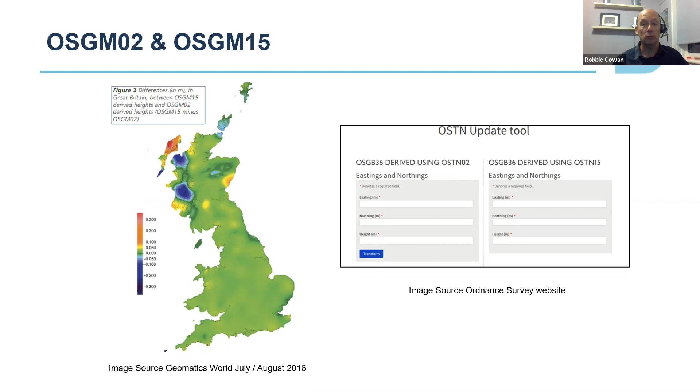On the right hand side is the OSTN update tool. You don't have to do any survey with this actually out in the field. You can simply put in the coordinates of your site, arbitrary coordinates within your site, and then a height. You could put 10 meters, for instance, and then you could do a check to the 15 and see what the height changes to, and that gives you the separation of the difference between the two geoid models. Very helpful to have.

Carrying on with the survey brief, terms and conditions. Obviously that's important to have within the document. You're specifying whether you're using your own terms and conditions or whether you're using client ones, but it's important to include those. An introduction and a background to the project as well, and the aims and objectives of the survey data.

The more you can tell or let the surveyor know about what the data is going to be used for, the more that, in a sense, they can help you. They're going to be your eyes when they're actually carrying out the survey. And so therefore, if they understand what your aims and objectives are, then they're more likely to be able to feed back to you anything they see that can maybe influence this actually in the field.

The survey scope itself needs to be clearly written and summarise the services that you require. So here's an example, it's the same document I've taken it from. You can see here 2 different water courses. The modeller has clearly specified how many sections they want. Eshton Beck, a total of 33 sections. On the Morton Beck, a total of 58 sections. And so therefore the surveyor knows at tender stage exactly how many sections are needed as part of this commission.

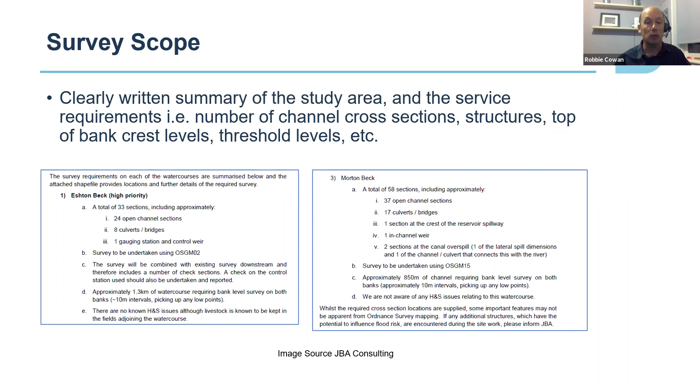There's a length of watercourse in each of them, top of bank in each of them as well. And again, the modeller has specified very clearly actually what's required: approximately 1.3 kilometres of watercourse required on both banks, again specifying on both banks so that it's very clear actually what's required. And then they include some health and safety as well, of known issues that they have.

The technical requirement of the survey scope: survey control. Well, you might already have survey control in your area, and so therefore you might just want to check it. Or there might not be any survey control, and so therefore you want the surveyor to establish new control. Or for larger projects, it could be both. It could be a case of establishing new control, but also checking onto some existing ones. Your reference system: Ordnance Survey National Grid, and probably nowadays OSTN15 and OSGM15.

The cross-section naming is quite important, specifying where you want the zero chainage to start. Is it a confluence? Is it part of existing survey data? So therefore you might want it to be tied into that existing survey data. And the format as well. Is there a specific naming format that you want it to follow? This is quite important because it's very difficult for the surveyor to change all this at the end, so they could deliver you all these sets of lovely deliverables, and then all of a sudden if you said, oh, I wanted the zero chainage to start at such and such a point, it would basically mean that they would have to reprocess everything. It would be very time consuming.

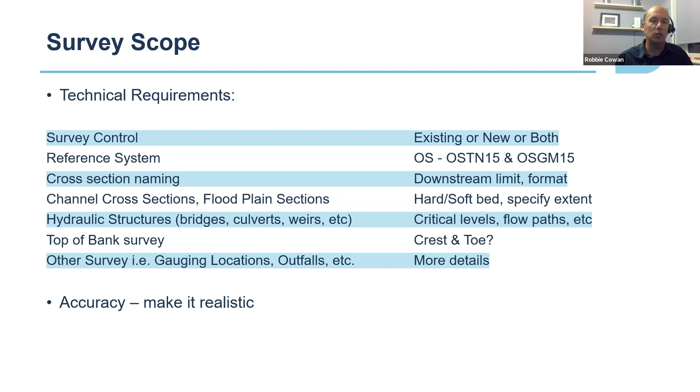But if you just said straight away, well, you want all your survey data to plus or minus 5 millimetres, for instance, that would add tremendous cost onto your project when it's not needed. And the problem you'd end up getting is that, if you went to 2 or 3 survey companies, some of them might just dismiss that accuracy and say, well, for a grass bank, top of embankment, you don't want 5 millimetres. You can't use that accuracy. So I'll just discard it and I'll do what I think's right. So as I say, it's important that you make the accuracy realistic.

The kind of last thing in the survey scope is the deliverables. You need to state clearly what deliverable formats you want. The survey report should be comprehensive for a national data set. It needs to go with the data, and it needs to explain the survey, how it's been done, how things have tied together, how you've incorporated cross-checking and made the results robust.

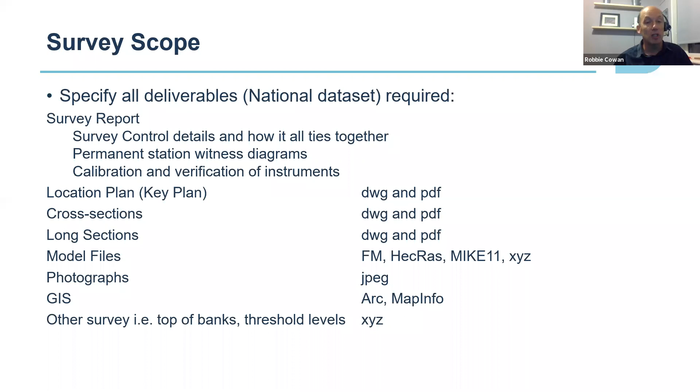You need to include your permanent stations as well and your calibration certificates. And then there's a number of standard deliverables that are contained within the Environment Agency survey specification. Location plan, cross sections, long sections, model files, probably in all those formats, so they have the flexibility of multiple users or in the future. Photographs, GIS, and other survey like tops of banks.

The big difference with a site-specific requirement is that it's only you, the modeler, that's going to be using that data. It's not going to go into some data archive. So therefore, you potentially would cut right down the deliverables that you're requiring. I would still ask for a basic survey report because that again tells you the user how things are tied together. If there's an existing topographical survey, you want confirmation that it's been tied into that.

Location plan, so you can see where the sections have been taken, cross sections, model files, just a single format, whatever model software you're going to be using, and obviously the photographs. So it's cut down quite dramatically.

The mapping is very important, as well as having it written down, what's actually required. The surveyor needs to see a graphical representation of it. And it needs to be as clear as possible and as precise as possible. So within your GIS table, instead of just having cross-section, if you had upstream face of road bridge, downstream face of road bridge, then this gives much more information to actually understand what you're wanting surveyed. It's good to include these tables in Excel format and PDF format because they're basically quite uniform to actually use.

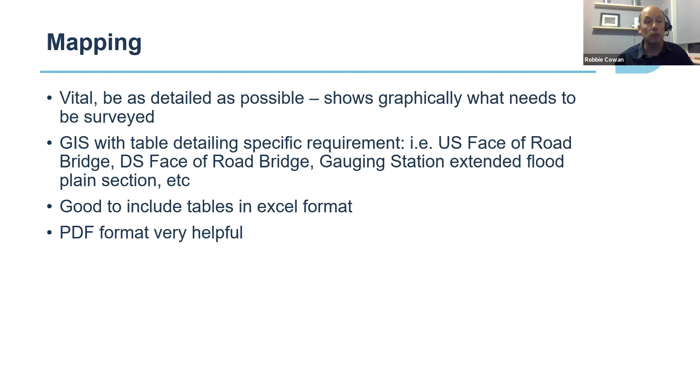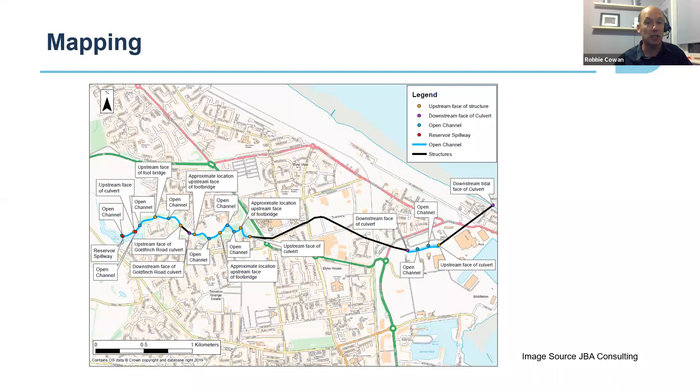So here's an example of some mapping. It's quite a small area, but I just felt that this demonstrated it quite well. We've got a couple of culverts there that we can see straight away, the black structures. The downstream end that's coming out at the sea, downstream tidal face of culvert. So again, we understand it's going into the sea, and it's to be shown as a straight line. But then the second culvert actually has a kink in it, a bend in it. So the surveyor understands for the centre line, for the chainages, what line they should actually be following. And then we have a description of the cross sections: upstream face, downstream face, open ones, and reservoir spillways. So it's all very clear to the surveyor what's actually needing to be surveyed here.

The project-specific associated information. This is something that you personally might not feel much value in, but it's good to pass on as much information to the surveyor as possible, right from the start, right from the tendering stage. So health and safety. Are there site-specific hazards that the surveyor should be aware of? If you already know there's some health and safety problem, it might be access into the channel, for instance, because it might be a closed channel with vertical walls. So it's good for you to be as descriptive as possible.

Landowner and access, any known difficulties there, it would be good for the surveyor to know about that. And it would be good for you to actually start thinking about that right from the start, because that can have further implications down the line. Environmental considerations, invasive species, giant hogweed, for instance, is that present on site? The surveyor should be aware of it as early as possible. And also, what kind of information are you going to provide them? Are you going to provide them with some historic survey data to check? Are you going to provide them with OS background mapping, etc.?

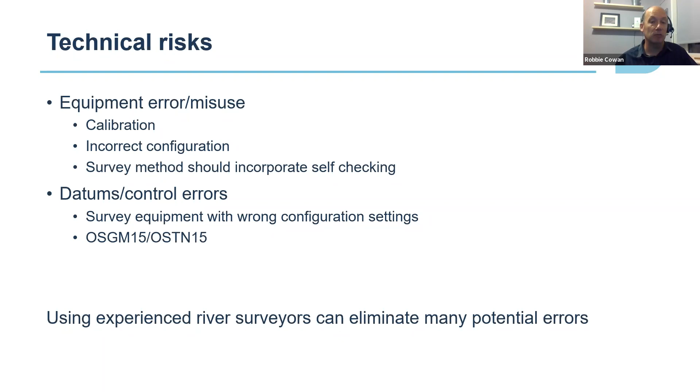Some technical issues that the surveyor and yourself have to be aware of is calibration and incorrect configuration of equipment. This will result in potential errors within the equipment, and it's important that survey methods should incorporate self-checking, and therefore it makes the results much more robust. And I mentioned the datums and the control earlier on, about the differences between OSGM02 and OSGM15, etc. So if you use experienced river surveyors, a lot of these potential errors can be eliminated.

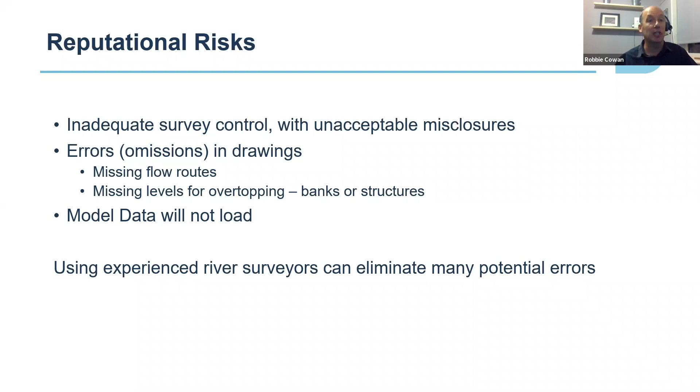And the same with reputational risks. Using experienced river surveyors can eliminate many of the potential risks, because they are aware of these. Omissions in drawings, missing flow routes. If you talk about a flow route to a non-river surveyor, they will just look at you blankly. But if you talk about flow routes and overtopping, etc., then an experienced river surveyor will know exactly what you're talking about, and they'll be trying to identify these things for you in the field when they're carrying out the survey.

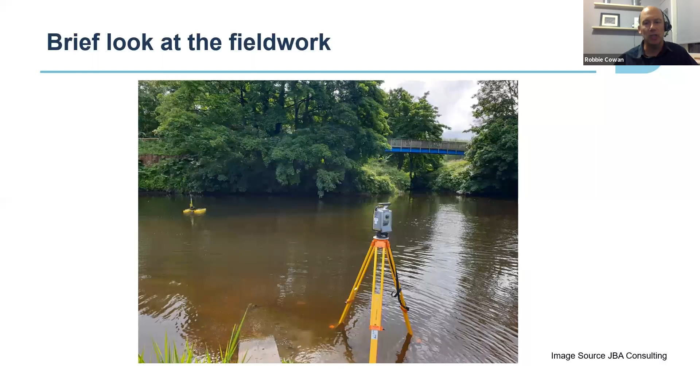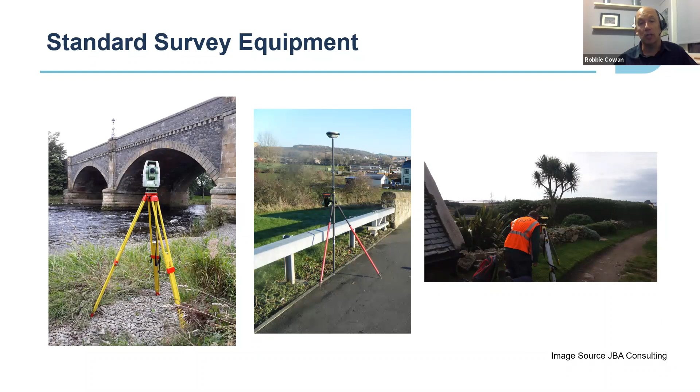The standard piece of survey equipment that surveyors use nowadays, in the middle, is GPS, Global Positioning System, which is the old term, because GPS is only the American system. The surveyors use GNSS now, which is a combination of multiple systems: the American system, the Russian GLONASS system, potentially Galileo, the European system, when it's up and running. On the left-hand side, we have a total station, which is part of the mainstay of the survey kit, and on the right-hand side, a digital level. So that's the standard pieces of equipment that a surveyor will use nowadays.

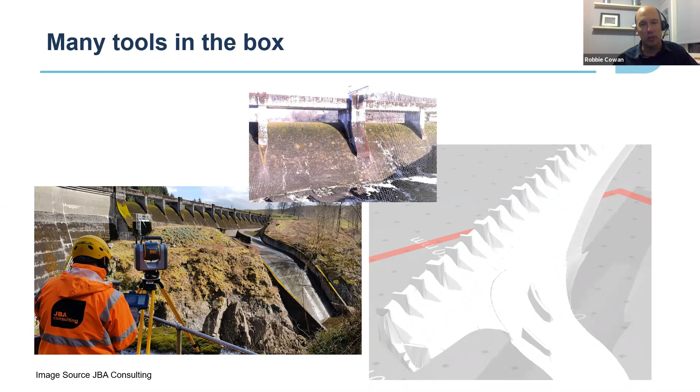But they do have many, many tools in the box. Technology has just gone crazy in the last 5–10 years when it comes to survey. So here we have a 3D laser scanner, and we've scanned the spillway of our dam, and we've basically produced point clouds and a surface for computational fluid dynamics. So it's much more complicated than just a 1D or 2D river survey. But as I say, this is where you shouldn't be specifying to the surveyor how they do the survey. You should just be specifying what your outputs are.

I'll quickly go through this. This is a cross-section, and I mean, it's obvious, but I just thought I'd stick a couple of slides in. The cross-sections always look downstream. They should always be at right angles to the flow, and they should define the positions of the main channel. Yes, very standard for the modeller, but it's just a case of the surveyor should understand these.

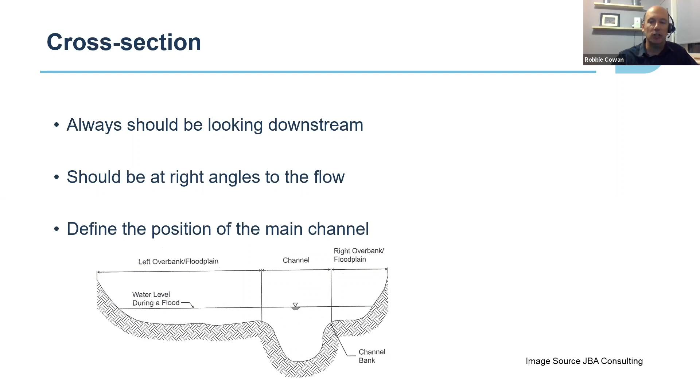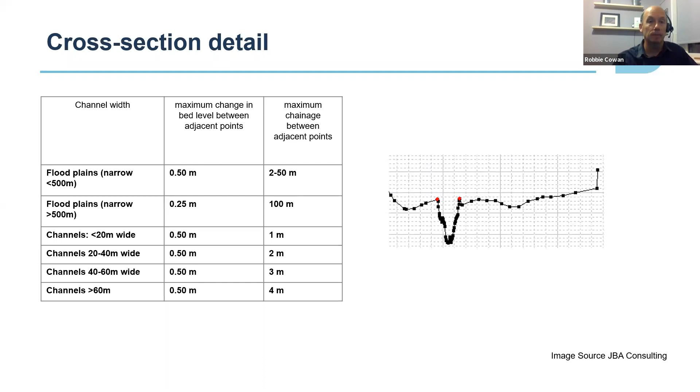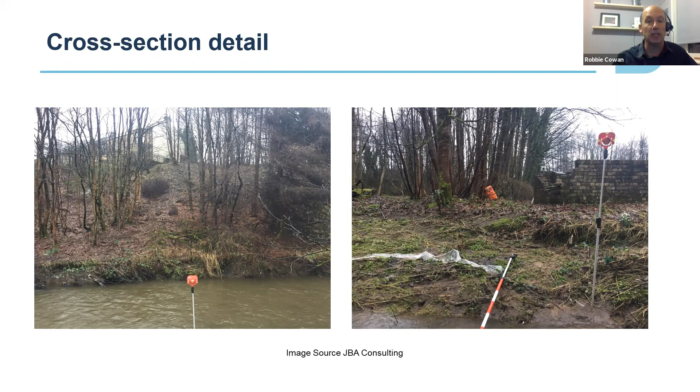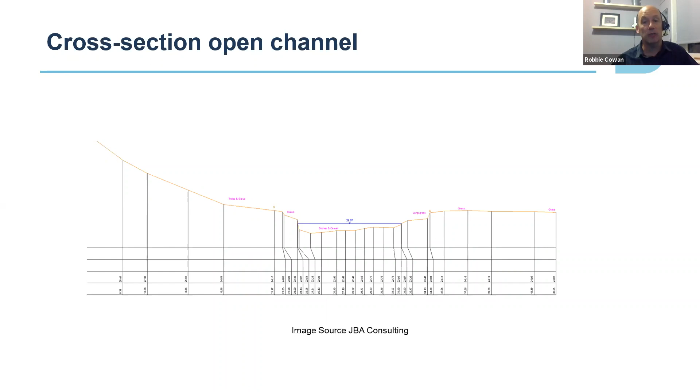So here's just an example, cross-section detail. So we've got a left bank, a right bank. You can see on one side goes up a steep banking, on the other side it flattens out. And this is just the representation we would have. You can see that we don't necessarily need to go this far up on the left bank because it goes to high ground, whilst on the right bank is where the water's going to flow. So therefore that's what the surveyor has to be keeping in mind when they're carrying out the survey.

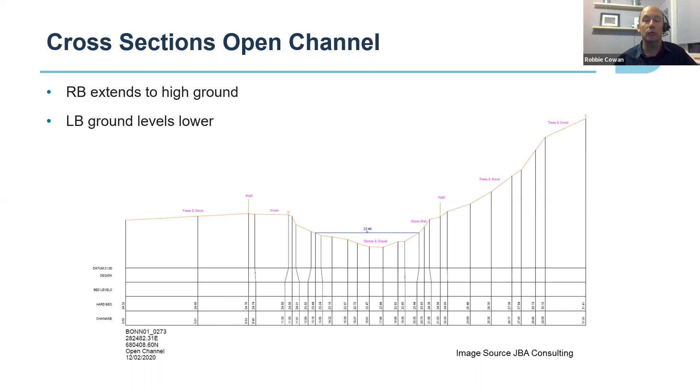Another channel, and again it goes to high ground on one side and the low ground on the other, and so therefore there's not really the need to go as high up on the right hand side as they have.

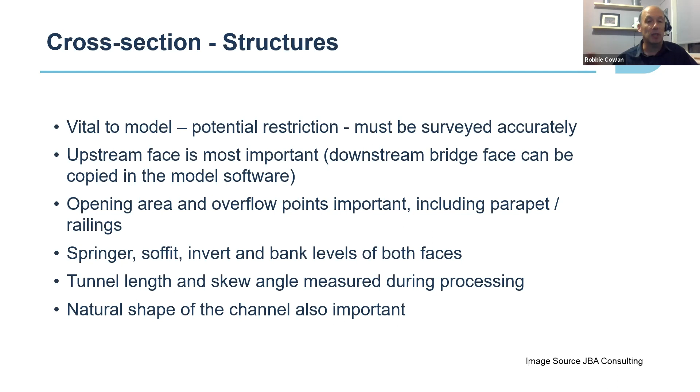Cross-section structures, these are vital to the model, potential restrictions, and they must be surveyed accurately. So the upstream face is the most important. The downstream face can be copied if need be, but the opening area and the overflow points are the important things, including the parapet and the railings. The springer, soffit, invert, bank levels on both faces would be surveyed and included in the cross-section. The tunnel length and the skew angle will be measured in the processing stage with the data that's been collected on site. And the natural shape of the channel is also important.

So here, as an example, we have a footbridge, but you can see the natural shape of the channel has been surveyed correctly. The surveyor's not taking it up to the deck level at the end of the bridge because that's not how the natural shape of the channel lies. And the other thing important here is that the walkway, the deck level, actually ties in to the ground level, and so therefore the modeller can see where the overtopping would be.

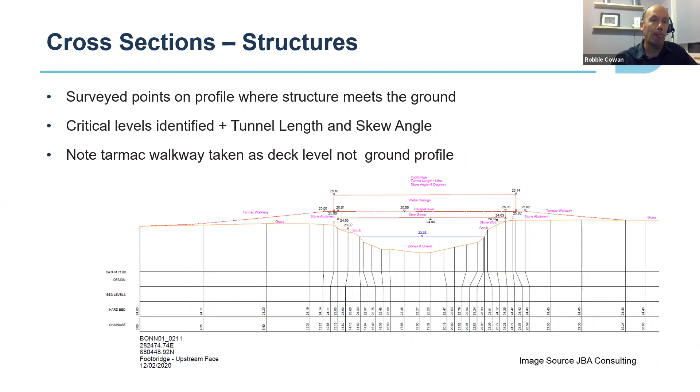So just a quick example, good and bad. Very quickly you would see that and you think, oh, it looks quite good. I like the brick effect on the facade, but it doesn't go far enough up, basically. It stops short of the deck level. It needs to extend to the deck level so the modeller understands. Also, the pillars and the abutments, there's not a point being taken, so there's not a chainage marker at those points, which is important, so that the modeller can quickly and easily understand the width of the structures, the openings. So not as good as it first appears.

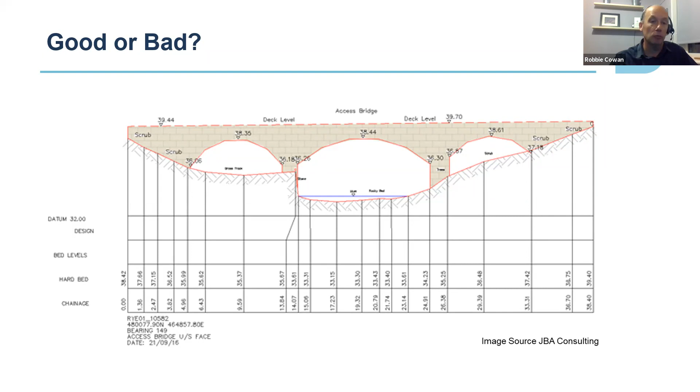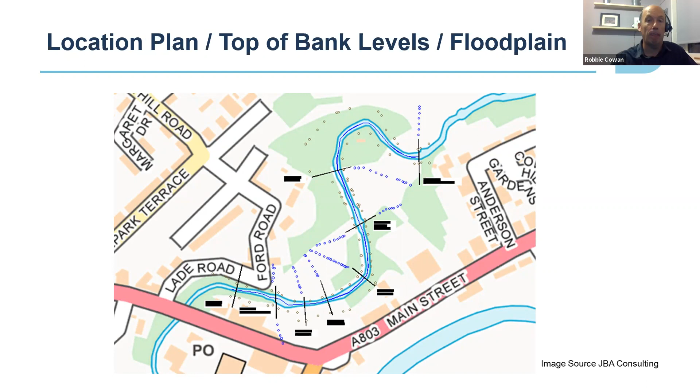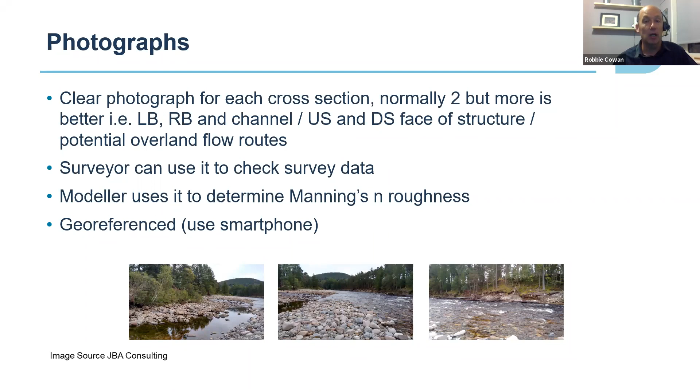Here, finally, we have the location plan, and what we've done here is we've actually incorporated the top of bank levels and the floodplain levels on it as well, just so that the modeller can get a really good overview of all the survey data that's been collected in this project. Photographs are vital, and there should be enough photographs to clearly show the cross-section. They can be used by the surveyor for checking the survey data, and they're used by the modeller as well.

Last bit is the quality control. So we've got all the survey data in. The modeller should use a validation spreadsheet to just have a system in place on the checks. Kind of checks that they're going to do: the structure length, is it included? Are the soffit and invert levels labelled? Is there skew on the structure? Has it been identified? Things like this. Cross-section levels equal long section levels. So double check, cross-check data that you've been provided with and make sure that they tie in together. But have a structure basically here so that it's part of your audit process.

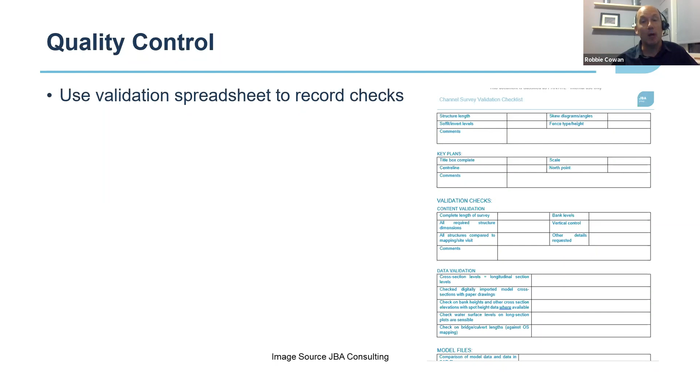So the potential survey issues. A couple of slides here. Locations missed causing delays, i.e. gauge boards or discharge pipes or weirs. Well, the solution: a clear survey brief. Pass on as much information to the surveyor as you can and use experienced river surveyors, and they are much more likely to actually appreciate what information needs to be collected.

The same with insufficient detail taken along. Use long cross sections. Use experienced river surveyors. Incorrect survey locations: be clear in the survey brief. Sometimes it's okay to move an open channel cross-section, and the surveyor might move it for 5 or 10 metres for a particular reason, but sometimes it's not. If it's a narrowing or a changing gradient that you've identified and you want it specifically at that point, then maybe make that clear in the actual survey brief.

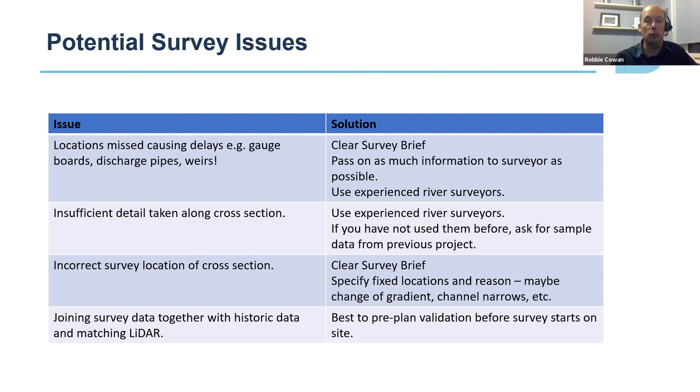Joining of survey data together, as I say, this is always best to be pre-planned and included in some sort of validation before you start on site. Late delivery of data: well, if you have regular progress reports, then you're going to keep on top of that. Changes in the specification that are not implemented: written communication there just to confirm exactly what the change has been.

The model data doesn't load: well, use experienced river surveyors that have done hundreds of similar jobs in the past and have proven systems that work. And if not, then ask for some data. If you're using someone for the first time, ask for some data before they start the project, just so that you can test it. Same with the data naming and formatting. If it's the first time you've used them, ask them for some data, and then you can review that before they actually start.